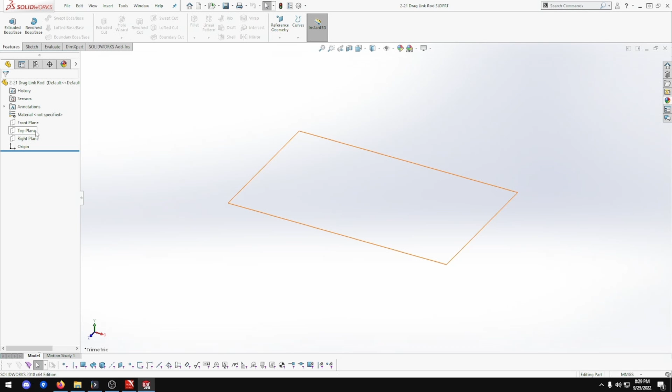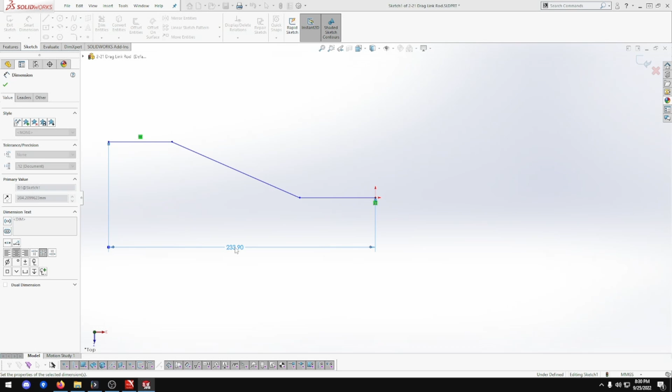So let's open up the template MMGS. I'm going to go to top view, sketch a line, angle it out, and use smart dimension. From there to there will be 233.9, that's going to be 40, and that's going to be 40. Excellent, okay, that's done. We just need this for reference.

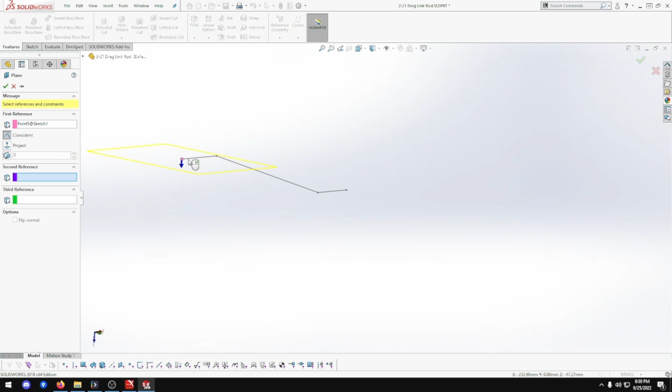So get out of that sketch. Now we go to reference plane. Click on this endpoint, could be either endpoint, then click on that line, and it's flat and done.

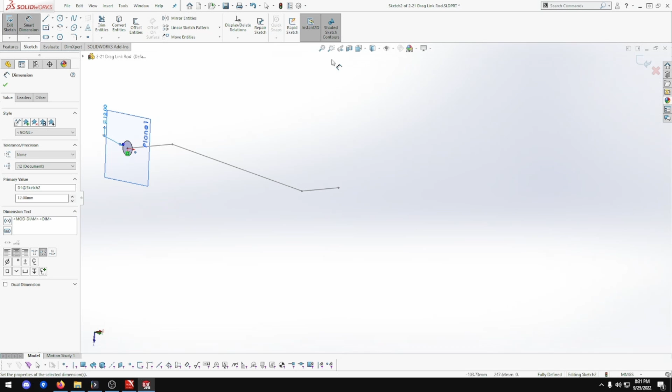Okay, so now on this plane, open sketch, circle. Make sure you click on that point there so it locks it in. That's going to be 20, no, that's going to be 12, sorry. 12. That's weird. Okay, so that's 12 done.

Excellent. Now let's get out of that sketch. Let's go sweep, boss, base. I think I got the right one. Let me just clear that so we've got the right one. Okay, that should be, yeah, that was the right one. Yep, and that one. And that's what we got. And done.

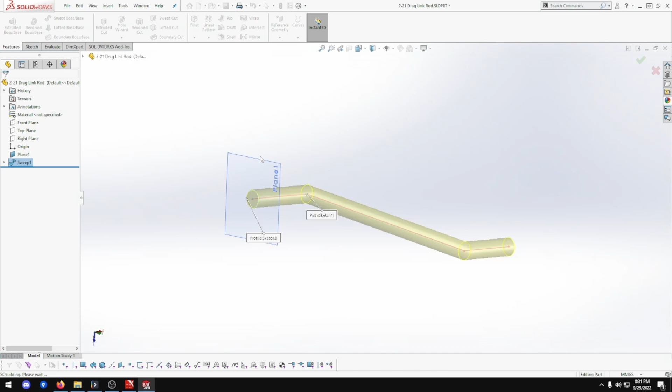Let's hide that. That's looking good. Let's just put some color to it. We're not finished yet, but let's just put some color to it - metal, brass. That will do. There we go.

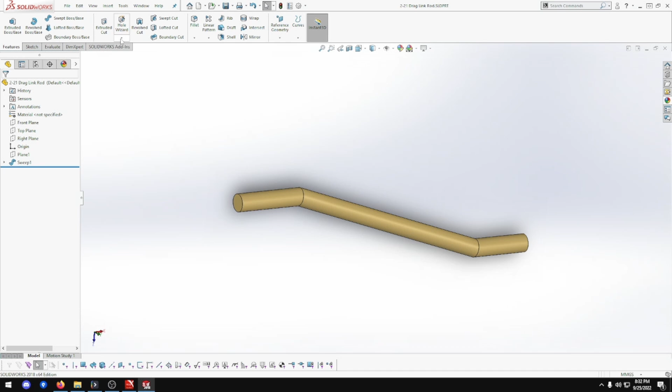Okay, so now we want to go thread. It's going to be M12. Perfect, it's already on there. We want to go to that circle there, but we want to go blind. It's going to be 20, 20, and done.

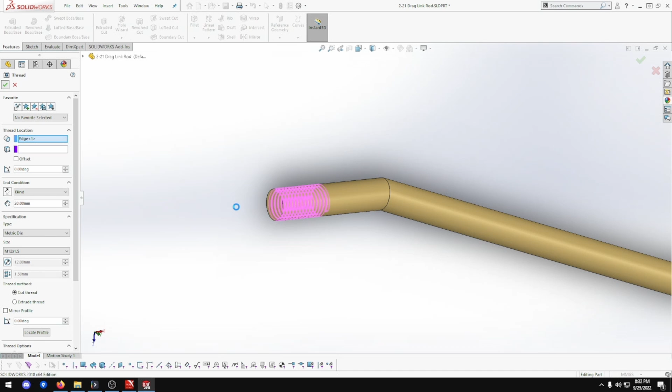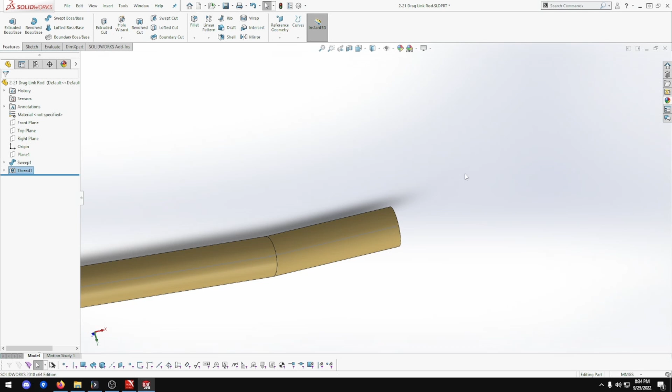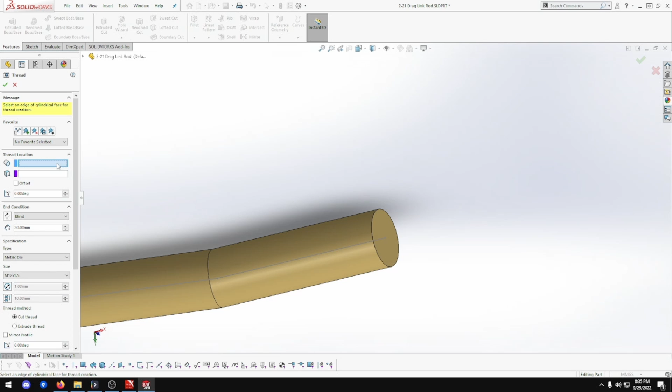Again, same as this one. We go to thread. We haven't got thread here, so blind 20. So if we go that one, because it doesn't show. Where's that one? So let's just leave it like that for now.

There's part 2-21 drag link rod for the Clayton Undertype steam wagon done.